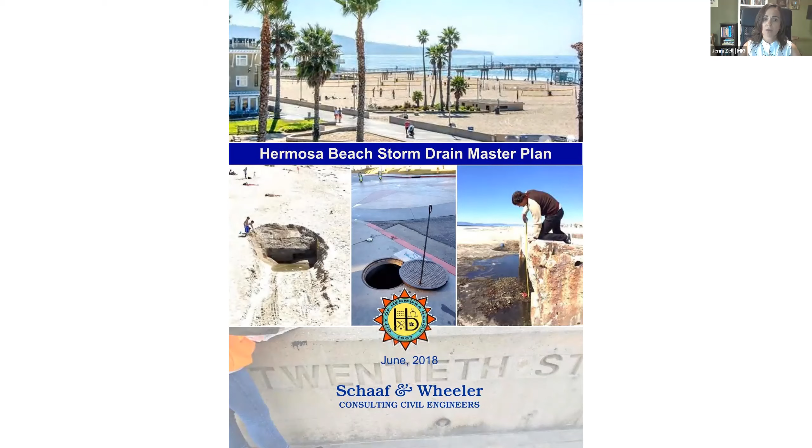And we're also building on the hard work and the existing studies that's already been done by the city of Hermosa Beach, including the 2014 Sea Level Rise Vulnerability and Adaptation Assessment, along with the 2017 Hazard Mitigation Plan, the 2018 Storm Drain Master Plan. So these are our building blocks. And we're also building on other city priorities that have been identified in previous planning documents. So what is the project, and what are we talking about specifically?

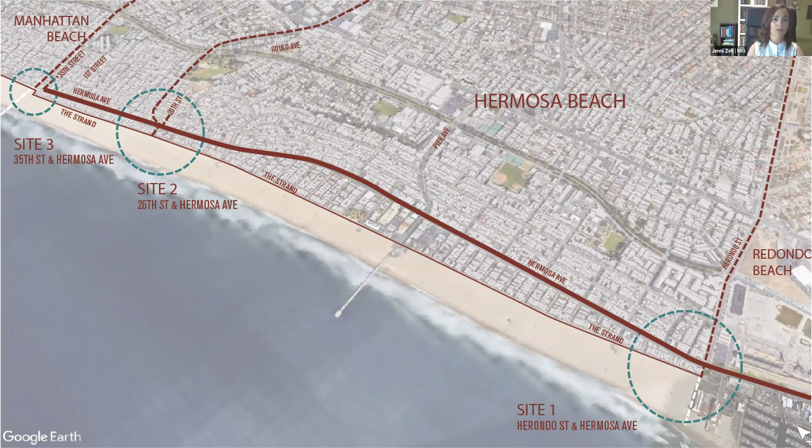Can you go back one, Andy? So we're looking at 3 different sites going from south to north in Hermosa Beach. The first site is all along Hermosa Avenue, but it starts at Herondo Street, moves up to 4th Street. The second site is basically right there at 26th Street. And the third site, the most northern site, is 35th, right there at the Strand and Hermosa Avenue.

And as we mentioned, these are really the goals that are getting integrated into these project sites. And our project has two phases.

It's a constraints analysis and conceptual design. We started the project in spring of 2021 with one of several site visits, where we observed and evaluated the existing conditions. We've also conducted a couple of stakeholder meetings. We've heard from different government and agency representatives and different community groups. Right now we're completing our technical hydrological study based on the existing storm drain, and also a sea level rise review and local refinement.

So this is midsummer, and we're at our first public workshop, where we're going to present these findings to you. Once we get your feedback, we're going to begin the next phase in conceptual design, where we'll look at what these adaptations are going to look like specific to Hermosa Beach. We're going to continue to meet with stakeholders. Our next public meeting is going to be our draft conceptual design in the fall. Our second public meeting will be final design.

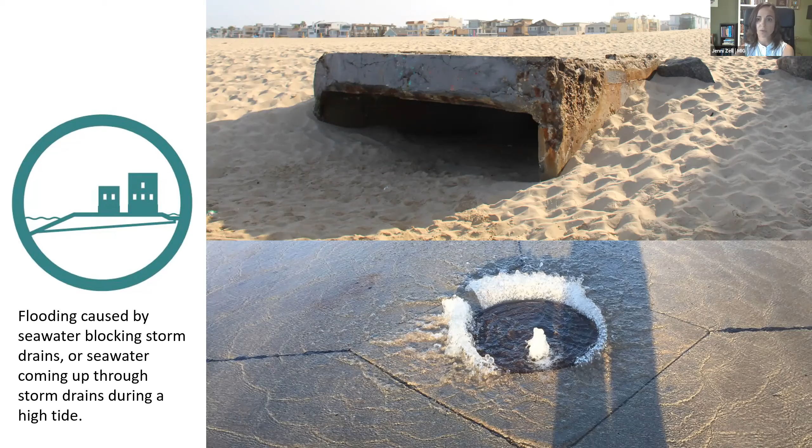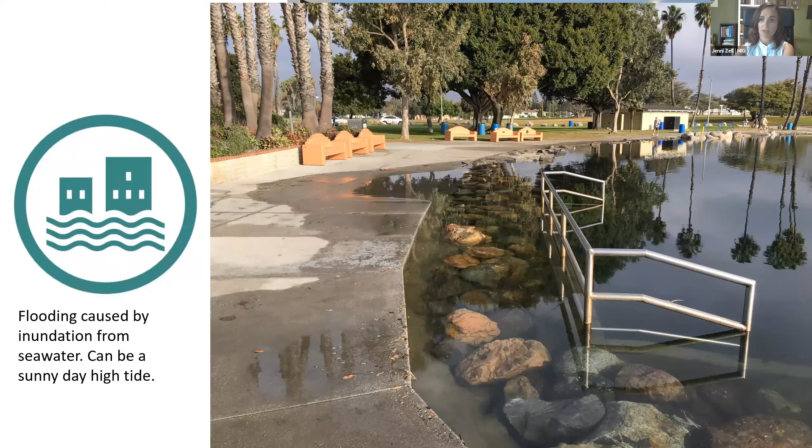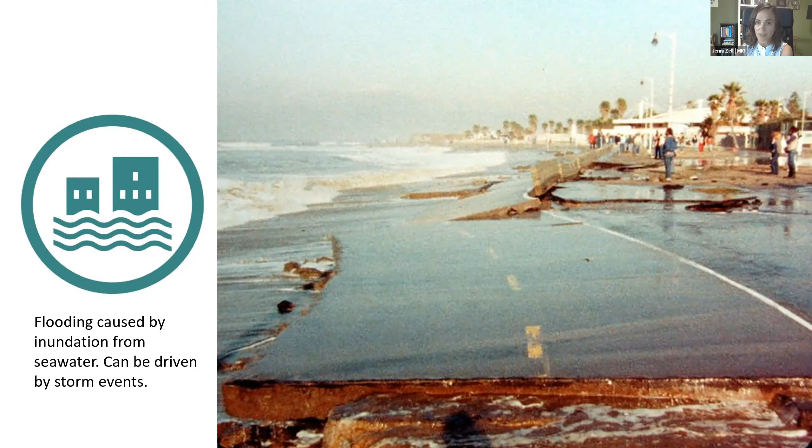We also have flooding caused by inundation from seawater. This is an image in Long Beach—this inundation can come at a high tide. This is a king tide here that you're seeing. The flooding can also be caused by inundation from seawater. This is an image from El Nino. I remember the 1983 El Nino when the Huntington Beach Pier fell, lots of damage. So that's another location of this type of flooding.

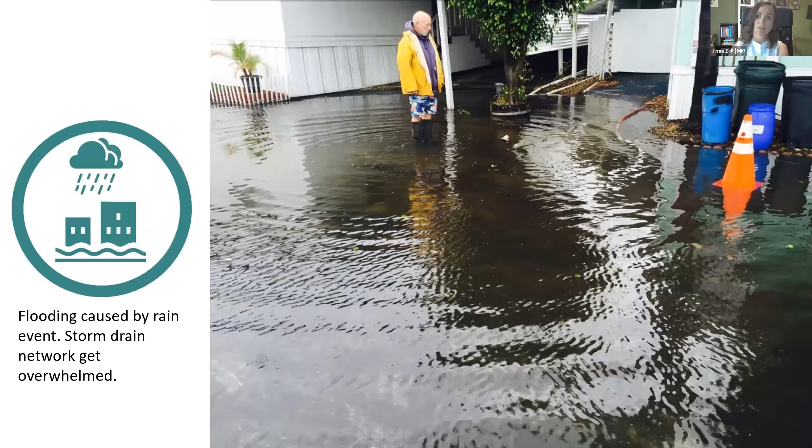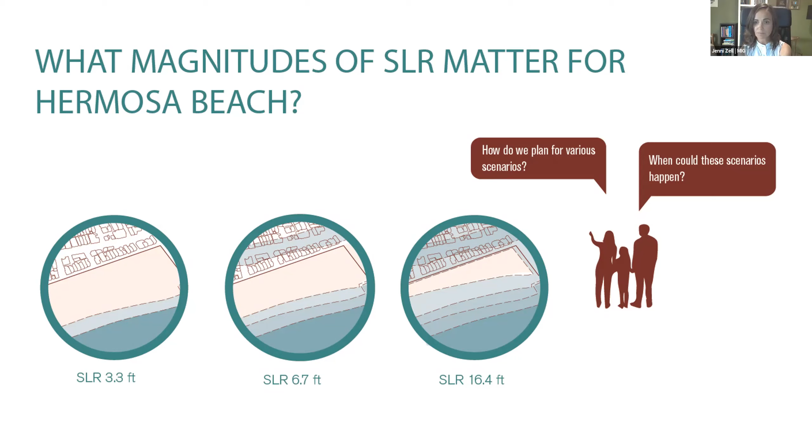So we're looking at 3.3 feet, 1 meter, 6.7 feet, and 16.4 feet, respectively. And so for all of us living near the coast, we want to know, and we want to know with certainty, when and how high the oceans will rise.

But that certainty is not achievable, because the future depends on a lot of variables like emission scenarios, plate tectonics, melting ice, and really a lot of factors that are unknown or that science doesn't understand.

So I'm hoping you'll remember these probabilities when we look at some of these next slides. We're not describing imminent scenarios here, but really a range of possibilities.

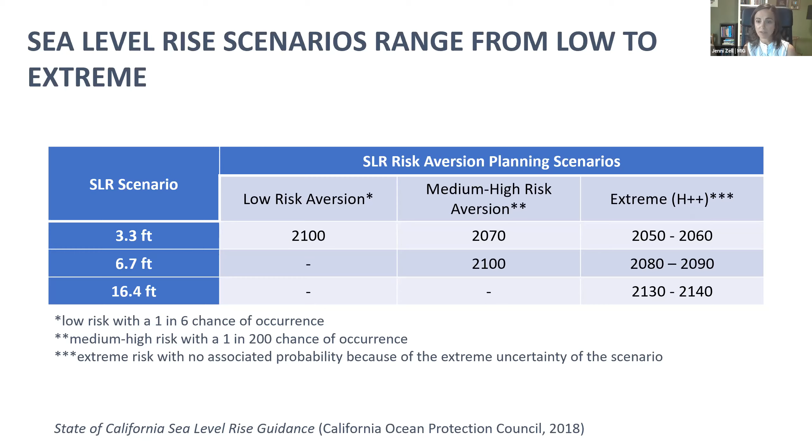And really, we want to emphasize that these are a range of possible futures, and they're tools for planning. Like Doug said, they help in the decision-making process, and they help to guide policies and also guide the dedication of resources. And so this is Hermosa Beach.

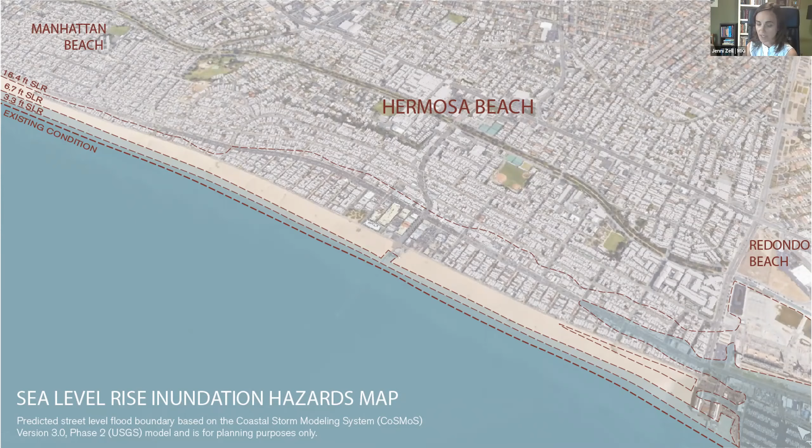This shows these different levels, 3.3, 6.7, and 16.4. These are predicted street level flooding boundaries, based on the Coastal Storm Modeling System, COSMOS version 3, phase 2, developed by USGS, a fantastic modeling tool. And again, the model is for planning purposes only.

And so this next slide shows our 3 sites, and also identifies some of the priorities that the city has for these different sites. So for the first site, we have mobility enhancements.

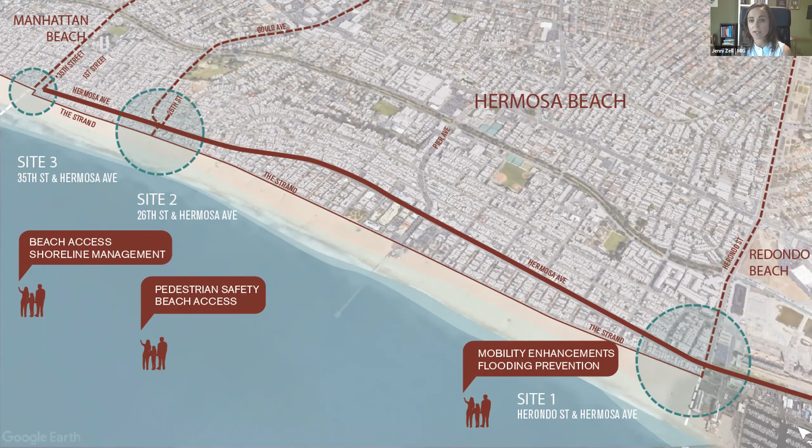We'll look at what some of those look like later. Flooding prevention - site 1 is our lowest lying area. Site 2, pedestrian safety and beach access. And site 3, again, beach access and shoreline management. And so these present really opportunities to combine future projects with potential improvements.

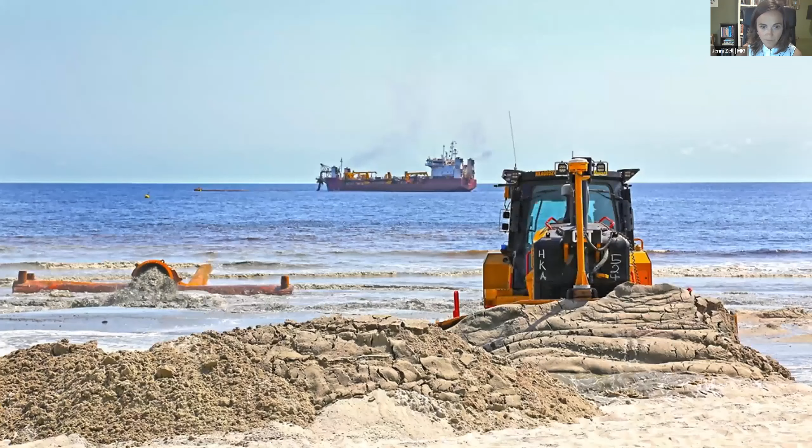As I mentioned, beach nourishment requires mechanical placement of sand, and it can also destroy the habitats underwater. But what doesn't require mechanical placement are vegetated sand dunes, like what you see here.

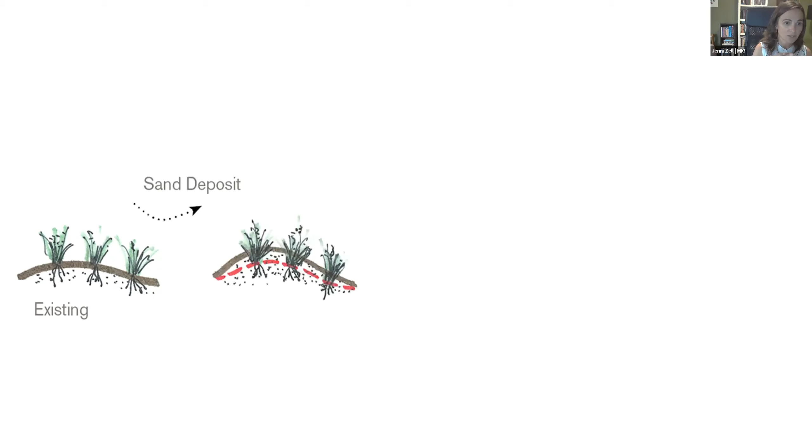This is Surfer's Point, a project Dave Hubbard worked on, and it's incredibly successful, based on a natural system. Essentially how it works: you have existing sand with vegetation on it, then a sand deposition event occurs, the vegetation grows in mass, and it happens again and again—so you get new growth over time that helps hold in the soil.

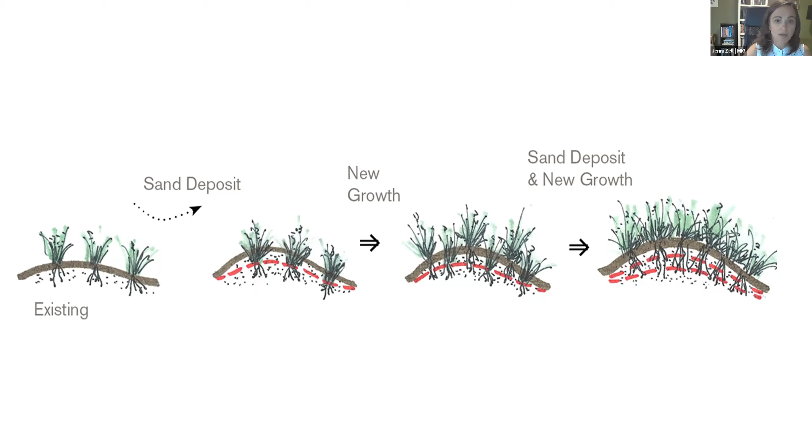It doesn't protect from an El Niño event, but these sand dunes can offer some sacrificial material in big storms, and they can certainly protect in low-elevation scenarios—it's amazing to watch what they can do. Some pretty cool things can happen there too, like a snowy plover showing up. Again, these are just to illustrate the range—like we've looked at ranges of sea level rise, there's a range of solutions we can look at.

We've got a fantastic team looking at our next steps, including a living shoreline at the 35th Street location. We understand there are a lot of constraints there, and we've heard from stakeholders and community members about what those are: visibility, access, emergency access and maintenance, plus a couple of outfalls and easements. It's a challenge, but we've got a fantastic team to start exploring what this might look like.

Great, this soft solution—thanks, Jenny, and again to the team for putting this information together. We really want to pause here and open up to engage with all of you on the improvement section as well.

I mean, again, if any new questions come up from the initial findings, happy to go back to those as you like. So I want to encourage all of you to weigh in and offer your thoughts.

Let's come back to where Jenny just ended, talking about these potential soft solutions. I think this speaks to that living shoreline concept. The team is initially thinking the 35th Street site may be a great opportunity for a living shoreline concept, for example. But again, we are still early in the process, and we'll do some design work still.

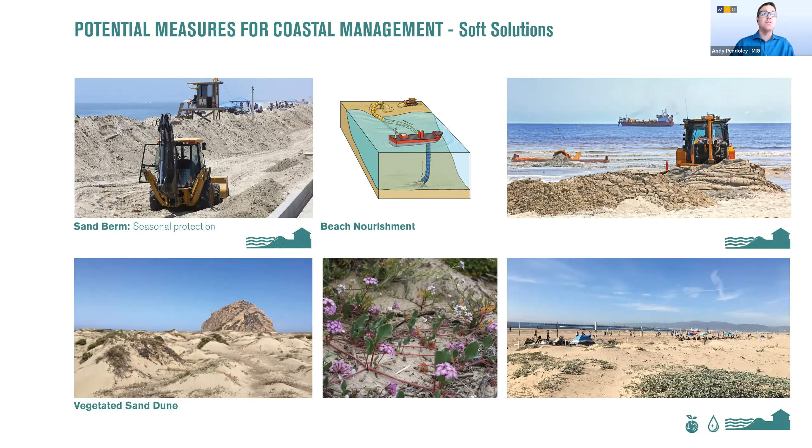So let me skip around to some other images. Excuse me, I'm going the wrong way in the slides here. Let me go back just a couple slides.

Craig, heard you loud and clear. I know, Jenny, you're not really in favor of the hard solutions, and Surfrider is not at all, virtually at all, but would certainly like to hear from any others, any thoughts or questions around the hard solutions as well. Let me also reflect back on some of the other points.

Pratik, I see your comment in the chat, which is great, thank you for sharing. The permeable road surfaces are really appealing to you. Would love to hear more about why those are particularly appealing. If you want to come off mute and talk, that'd be great, or if you want to put more comments in the chat, that'd be wonderful to hear.

As you can see, these are actual pictures of actual built projects. So these aren't theoretical tools, they're out there and working every day.

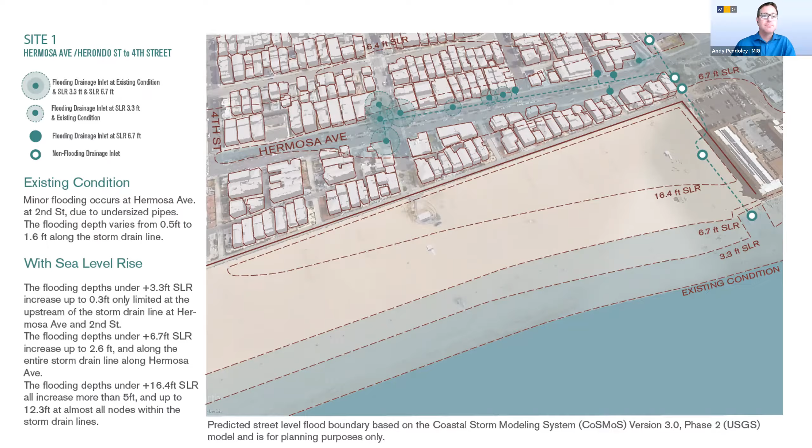Maybe if I can jump in. The ADA thing on 35th Street, the stairs. I've carried bicycles up and down those stairs so many times I've forgotten. But if you're wheelchair bound, you're out of luck. I have a very good friend who's confined to a wheelchair, and he's tried for years to gain more access. As he always says, if you can walk there, I should be able to roll there. But you can't, the stairs there are a hard barrier. I've seen people struggle, even healthy people, getting up and down the stairs on a hot day carrying a bike.

So those aren't very user friendly. Some of the access points farther down have planters in the way of the walk streets and things like that, that are just not pedestrian nor bicycle, and absolutely not wheelchair friendly. So I think that should be a core design thing, built in, so you don't have to think about it after the fact. It's really important because we need to consider everybody having equal access, and from a design standpoint that clearly wasn't there when these things were put in place. So thank you. Very good. Thank you, Craig, appreciate that.

I would like to add to that too. I hope I'm not speaking out of turn, but the city was smart in combining these projects, because we did bring this up recently. We had a stakeholder meeting with the Coastal Commission, and that's a tough pill to swallow, more concrete on the beach. That speaks to the combining of efforts required to get these kinds of projects done, including the living shoreline solution.

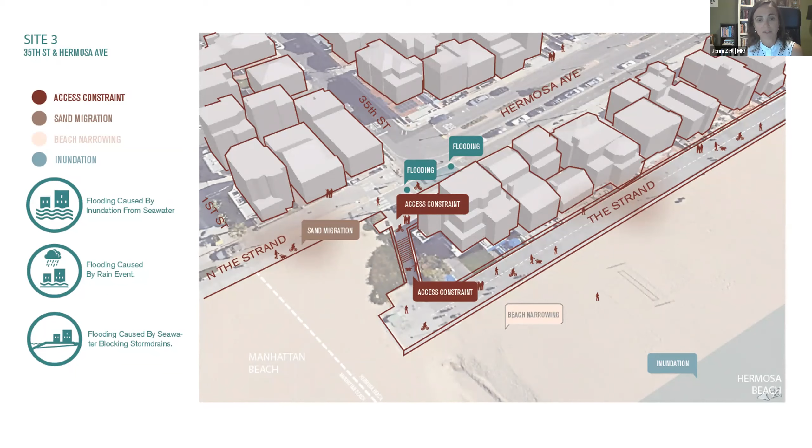I want to jump in on that. We aren't advocating more concrete on the beach. In fact, I'm opposed to that. What I would like to see is these stairs gotten rid of and electric wheelchairs made available, so people in a wheelchair can go anywhere on the beach where their friends are, and not be confined to mats, and absolutely not be confined to a sidewalk built out on the sand. So I think we're missing the ball on that part, and I'm going to try to help my friend put a plan together on that.

But I absolutely agree, it's not right to put an access cement walkway out on the sand. It's just wrong, it doesn't belong there. And the temporary mats are only a temporary solution. So I think there needs to be more innovative thinking. I suspect there could be funding sources for this—if somebody wants their logo on an electric wheelchair, sure. But that would mean we wouldn't need to build those unusual structures on the sand that restrict the sand's natural properties.

So I had to jump on that, sorry. No problem. Thank you, Craig, appreciate the comment. So good.

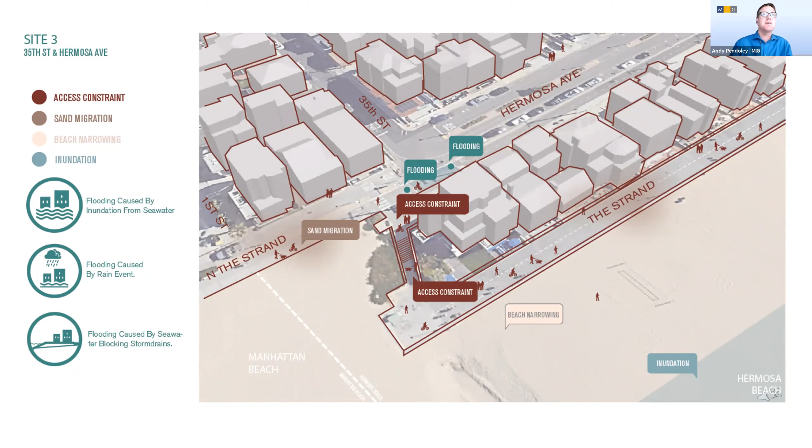And Pratik, thank you, yeah, community engagement, community input, and concern about previous projects that have or have not occurred due to resistance. We're definitely in the early stage of this effort, we still have more work to do. This team will be working hard to reach out beyond a public workshop like this to connect more with stakeholders in the community, particularly around these specific sites, to look at the opportunities, concerns, issues, and how we can explore different improvements that meet localized needs in some of these locations specifically. So Pratik, thank you for that comment, we agree it's going to be important for engagement and transparency.

So any further thoughts here? I'm just briefly cycling through the potential improvements again. I want to keep it open here. We're doing well on time, we have as late as 8 o'clock. We won't go as late as 8 if we've heard from everyone tonight.

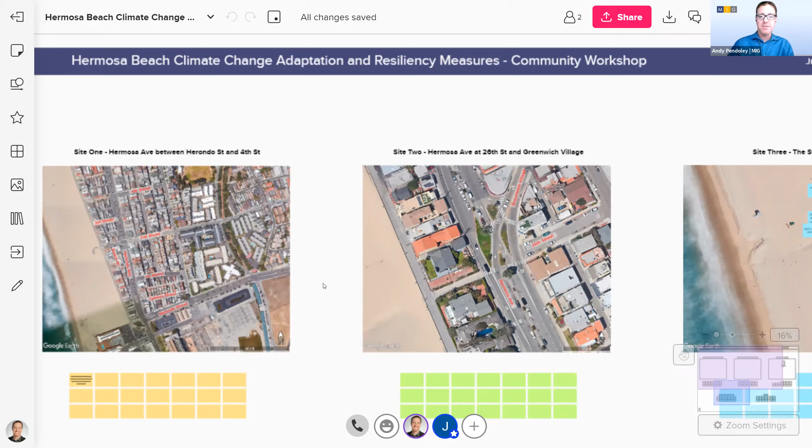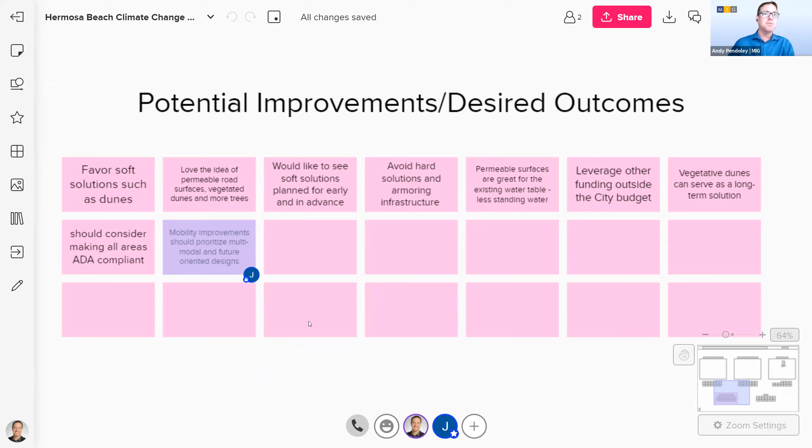I'm going to show you a different screen. Our colleague Joey Nielsen here with our team has been taking notes behind the scenes as you've all been chatting, and tracking those specifically. I'm going to zoom in and show you - it's like a digital whiteboard is one way to look at it. He's been taking your notes that have been coming in and recording those here. To Pratik's point about transparency, we want to make sure we're capturing all the rich comment and discussion here today, and he's doing a great job of that for us. He's got notes to specific locations where he's been able to capture those. So I want to just acknowledge that and thank Joey for that.

But yeah, any additional thoughts here about these potential improvements, and again, that perspective of connecting different needs and opportunities, whether that be mobility, environmental, economic development, and more broadly in the city - stormwater improvement, greening of the city. Are there other specific areas, maybe within the 3 sites that we're studying, that anyone would suggest we should look at closely with the design concepts?

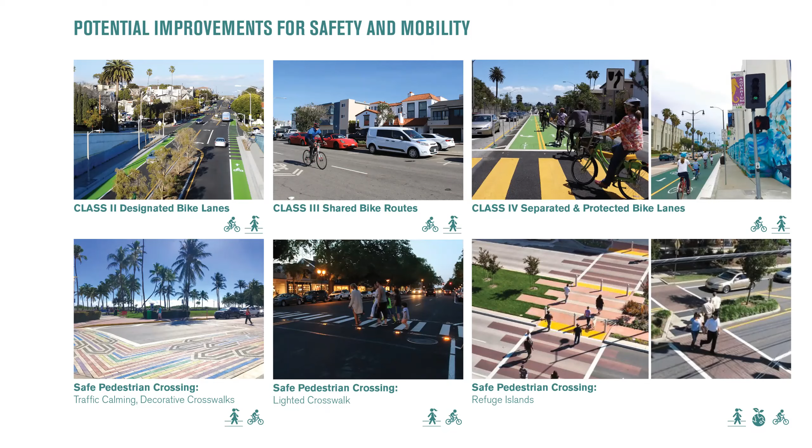I personally think it's a wonderful opportunity to accomplish a number of different things simultaneously that we probably couldn't do without the pressures of things like sea level rise. Looking at pandemic outcomes, we've got outdoor seating for restaurants, people getting out of their cars and interacting. I think it makes more sense to keep that perspective in place, even though we may switch back to hurrying through the city. But if we have things that slow people down, get them out of their cars, and enjoy the environment, and build that in as part of the response to sea level rise, to me that's a win-win situation. It may not happen any other way because of the expense, construction, and temporary inconvenience involved. But re-envisioning these areas as more people-friendly is the way to go, and that can build right in with the sea level rise infrastructure ideas.

Great, thank you. Very good.

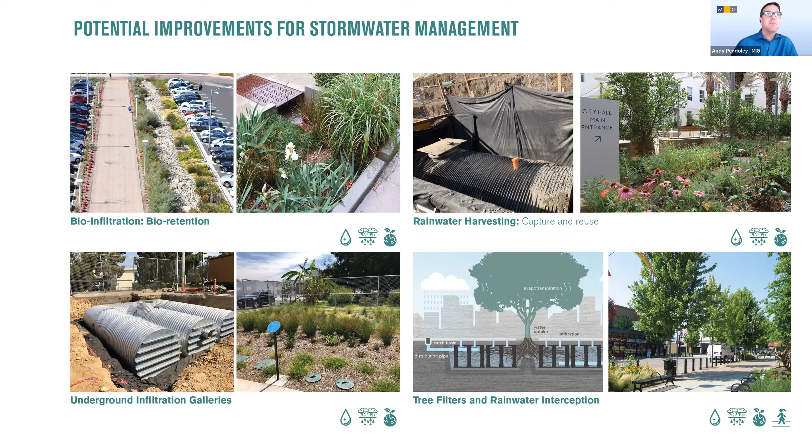Thank you, appreciate that question, Scott. Would love to answer any additional questions or hear ideas you all may have about potential locations for such improvements. Any additional last questions or thoughts here before we move into talking about next steps on the project?

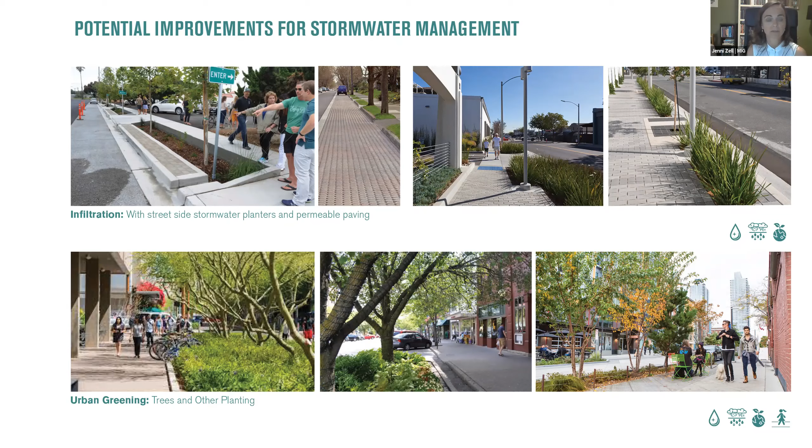Andy, do you mind going back to hard solutions for the coastal armoring? Certainly, yeah, I just wanted to pick up on one of Scott's questions. I don't know, Scott, if you're still on... Yeah, he's still here. Please.

I was looking in the chat - you're in that zone of Hermosa, in the low-lying zone. Something like temporary floodgates could be a partial solution for the water coming from the south, from Redondo. But was this just testing the waters? Would it be too drastic? These are big, expensive measures obviously, but I was wondering if this seems too drastic. This would make you sleep better at night. I was wondering if you're still there, if you wouldn't mind commenting on that.

If the water's coming, nothing's too drastic. They have a big system in Venice to deal with rising waters there that worked sometimes, didn't work others. I don't fully understand where exactly these would go in the system, but my other question is, how is what happens at the electric plant going to affect us? Are they going to raise that area up, and is that going to push water this way? There's a lot of factors, so I'm all for whatever keeps my garage as a garage and not an underground pool.

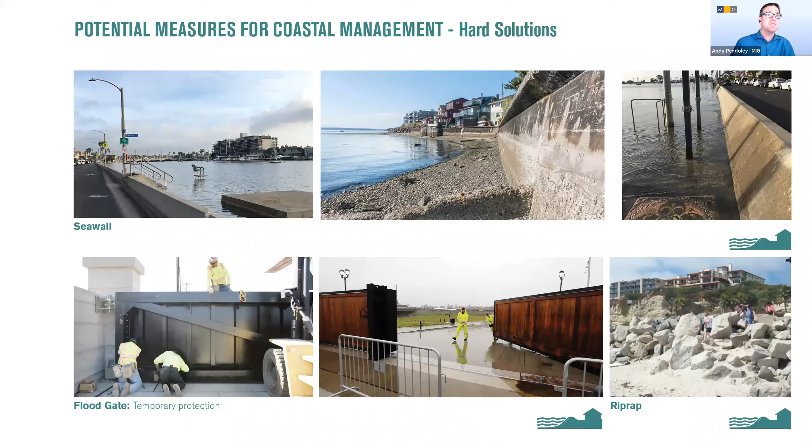I want to go ahead and bring Jenny back. Jenny, let's talk about next steps briefly, and talk a little more about what everybody can look forward to in terms of design concepts and what that process will look like, what we'll be studying, and then talk schedule-wise next steps and answer any last questions from our attendees. So Jenny, want to take it back and walk us through these remaining slides?

So for the next steps right now, we'll be moving into draft conceptual design and looking at what these different toolbox items look like in these areas, where are they feasible for the city of Hermosa Beach, for both the living shoreline and the green infrastructure.

Once we've produced a draft of the conceptual design, we go to our next public workshop, where we present that to the public for feedback on the draft, and do further refinements and have a final conceptual design third workshop. And in between all these, we're going to be having additional stakeholder meetings as well.

And then next, we produce a cost benefit report, including the cost of doing nothing, and then a funding source report. So those are really our next steps through the end of January 2022.